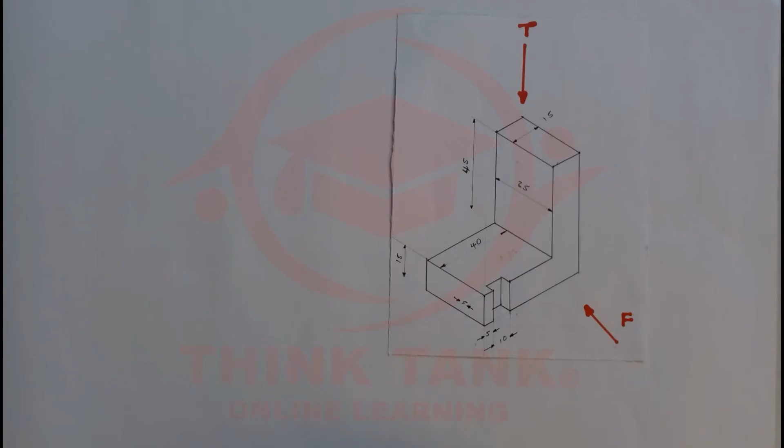So in this video, we're going to look at orthographic projection. So what you want to do, you want to draw the top view of this diagram and I want to draw the front view. Okay, so these are some of the N1 engineering drawing assignments.

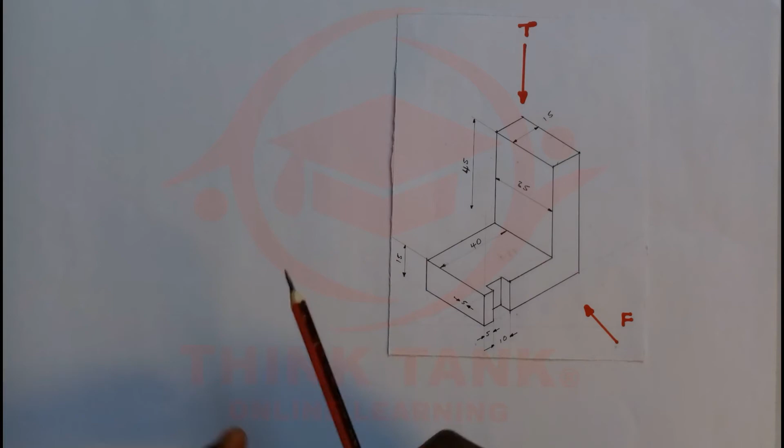Okay, so what you have to do, you have your pencil, a very sharp pencil, and in this case, I'm going to use 4H for construction, and I'm going to use B and HB for outlines. You also have to have your set squares. So this is the 30-degree set square, and this is the 45-degree set square.

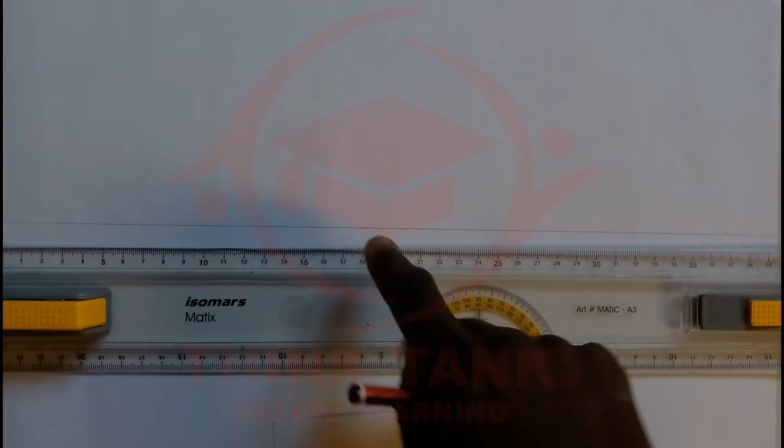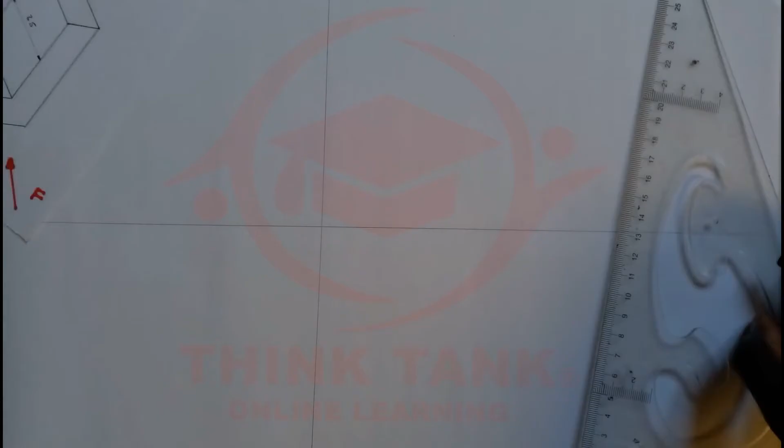Okay, so I'm going to draw this, and you're going to choose which view is easier for you to draw, the front view or the top view. So I'm going to start with the top view. I think it's easy for me. You can start with anything that you like. Okay, so from this, I'm going to measure just a distance, and we're going to draw a horizontal line. So this one is going to be our reference line.

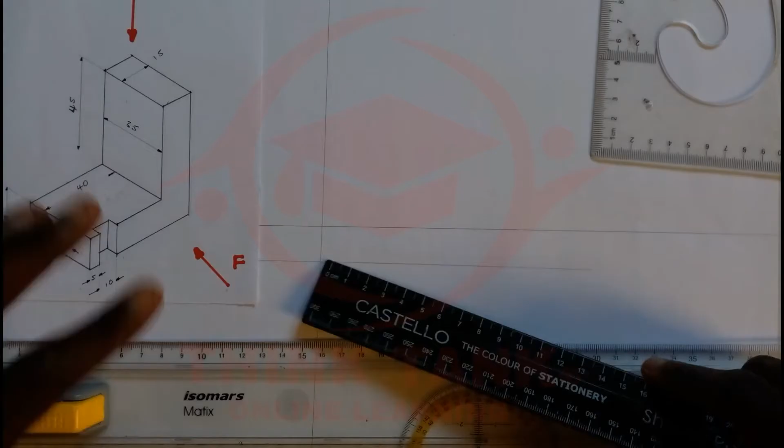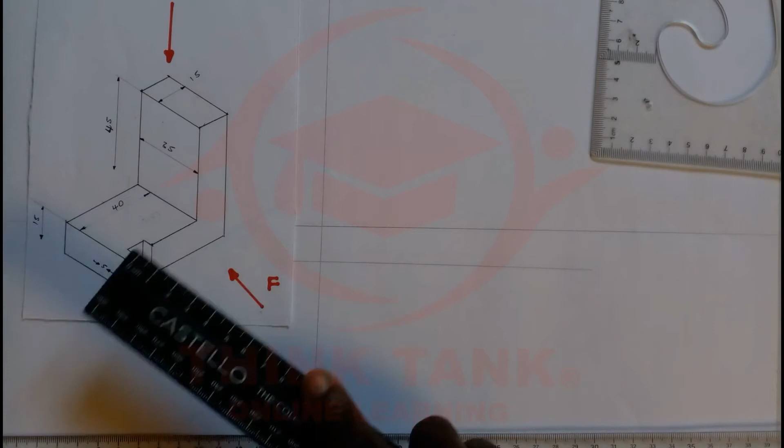So on the plan, I'm going to see this plane, and I'm also going to see this plane. That's what I'm going to see, and I'm not going to see any height. So any height, I consider it at 0. So I'm going to see the width and the length. The distance from here, when I look at the top, will be equal to 0. This plane and this plane will be on the same level.

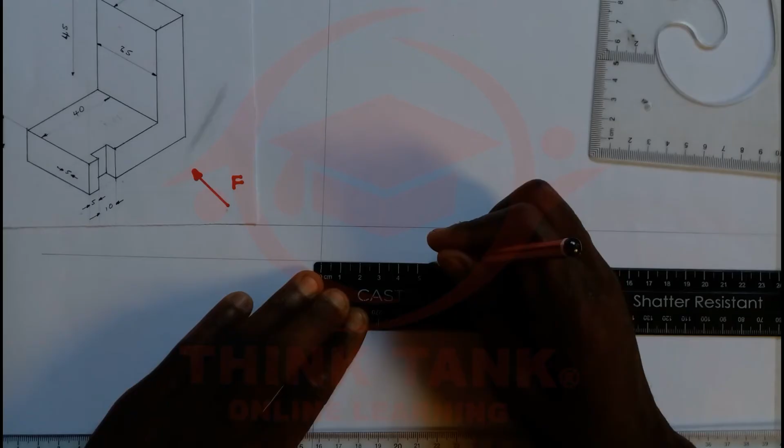Okay, so what is going to be the total length? So the total length is going to be 40 plus 15, and that's going to be 55. Okay, so starting from here, I'm going to measure 55 right here. So this is going to be 55. And I'm going to project it upwards because I'm going to need it later when I draw the front view.

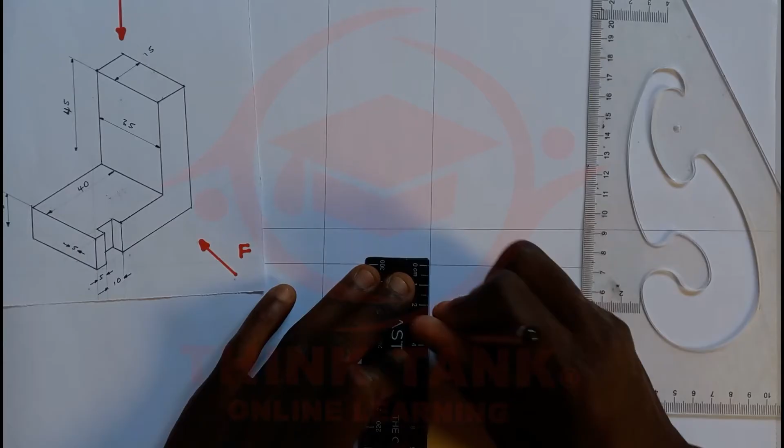Then what's going to be the width? So the width is right here. The width is 25. So I'm going to measure 25 from this line. That's going to be 25. And I'm going to project it right here using a T-square. Okay, and I have this distance, which is 15. From the end, I'm going to measure 15 from this line, and I'm going to project it upwards because I'm going to need it.

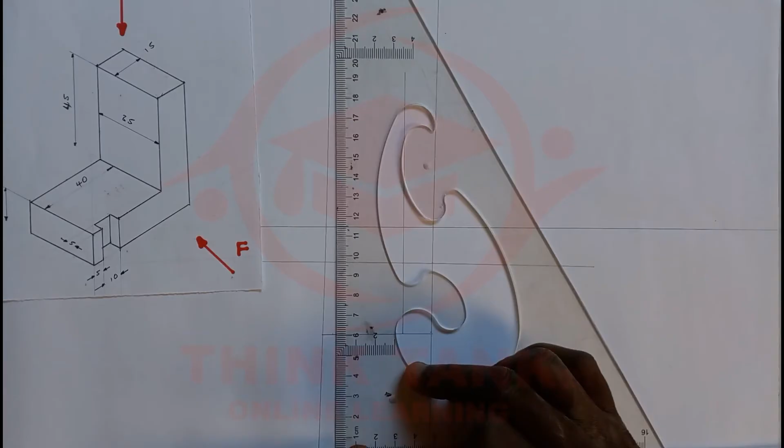And what do we have? So we have some demarcations here, some pattern here. I'm going to measure 5 millimeters from this end, from here to here. 5 is right here. Now I'm going to measure 10 again. You can just measure 15 starting from this end. Okay, just like that. And I'm going to project those lines upwards. We're going to need them. Okay, and we also have a distance of 5 from here to here. So I'm going to measure 5 right here.

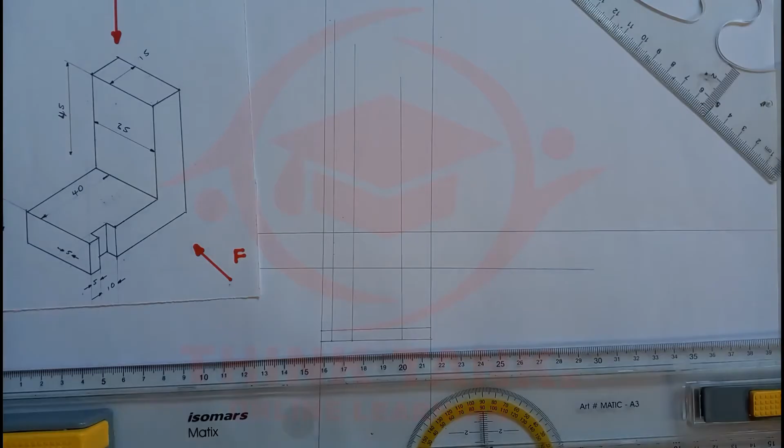Okay, like this. And now our plan is almost done. So what I'm going to do, I'm now going to outline. We said we're going to see this plane. I'm going to call it 1. Okay, so let's outline 1 right here. This is plane 1.

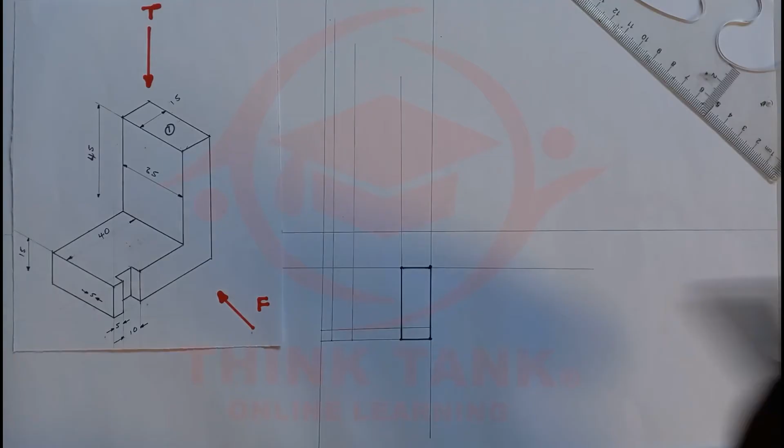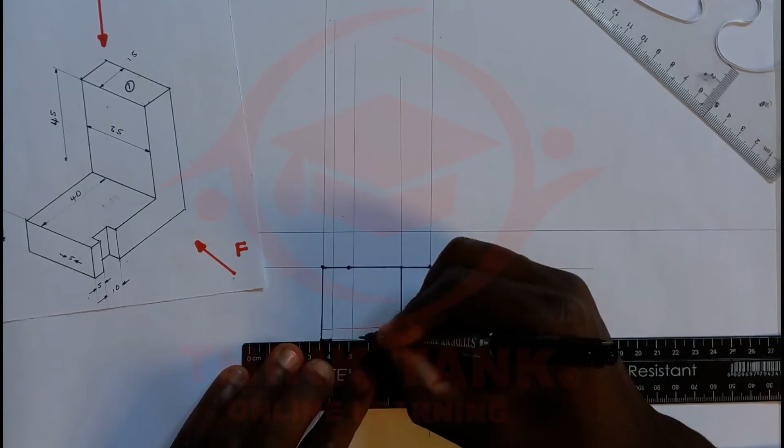And there's a distance here, which is the height, but that is going to be 0. So I'm going to see this plane from here. It's going to be good, and I'm going to have some demarcation here. So you can outline this side, dot and dot. Also do the same right here. And here, we're going to have a demarcation right here.

And also connect this and this and this. And this is going to be our top view. So this is plane number 2. Those are the planes that we're going to see when I'm looking on the top.

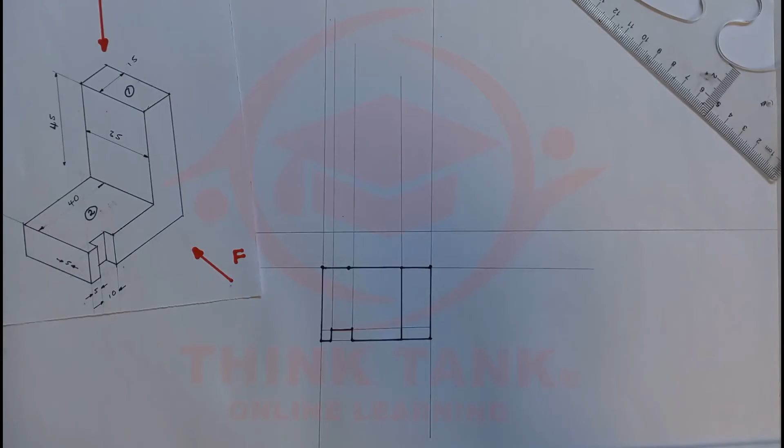Okay, so let's go to our front view. So on front view, what do we need? We're going to need the height and the length. And fortunately, we have the length. We're going to get the length from our top view. Okay, so what is going to be the height?

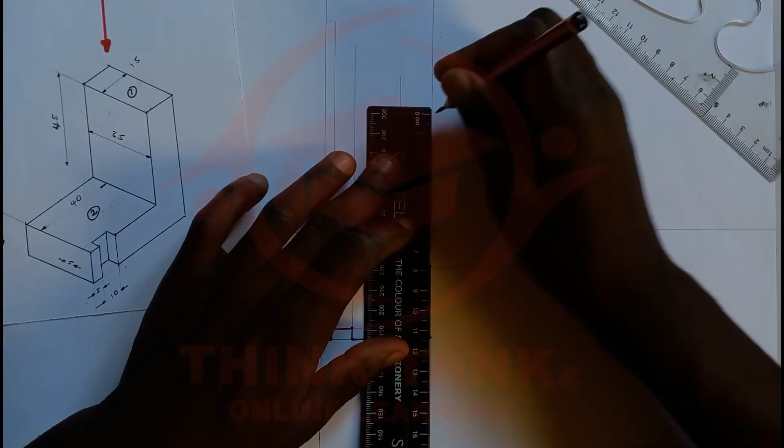So the height is going to be 45 from here to here. And we're going to have 15 again from here to here. So 45 plus 15, that's going to give us 60. So we're only going to measure 60 from this side. And we're going to project using our T-square. Okay, like this. And what else?

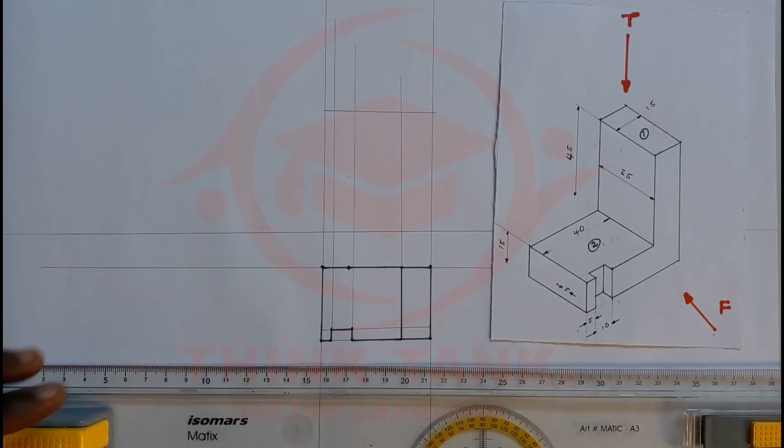So we need a height of 15 from here to here. We need a height of 15. That's going to be height of 15 right here. And we're going to project it like this. Okay, so now it's time to outline.

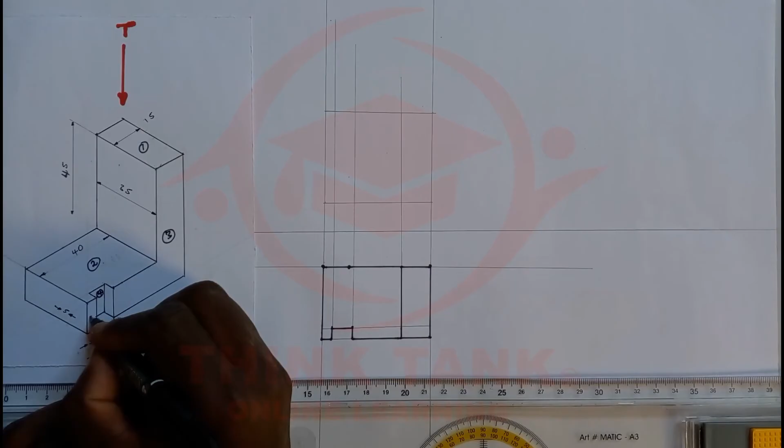So like what we did, we're going to name the planes that we're going to see. So I'm going to see this plane. I'm going to call it plane number 3. And I'm going to call this small plane, plane number 4. I'm going to call this plane, plane number 5. And what will happen to the width? The width is going to be 0. So the distance from here to here is going to be 0. It's going to be on the same plane.

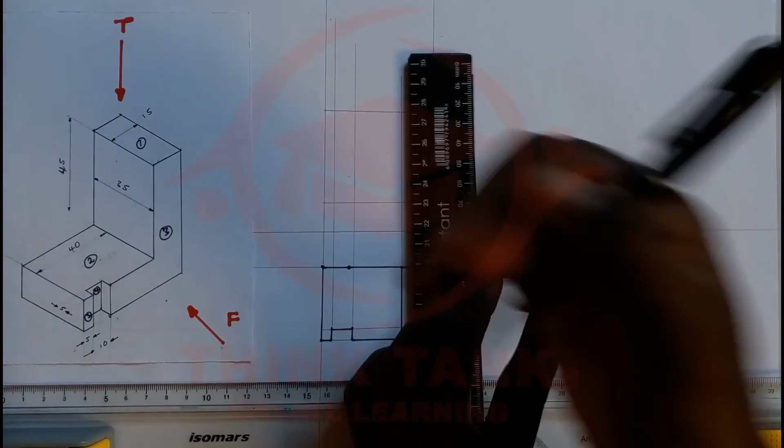Okay. So let's draw what we're going to see. So let's start by drawing plane 3. Okay. So plane 3 comes from here to here, and right here. Okay, so this demarcation, there's going to be width here, but you're not going to see it. It's going to be on the same level. So let's finish drawing our plane 3.

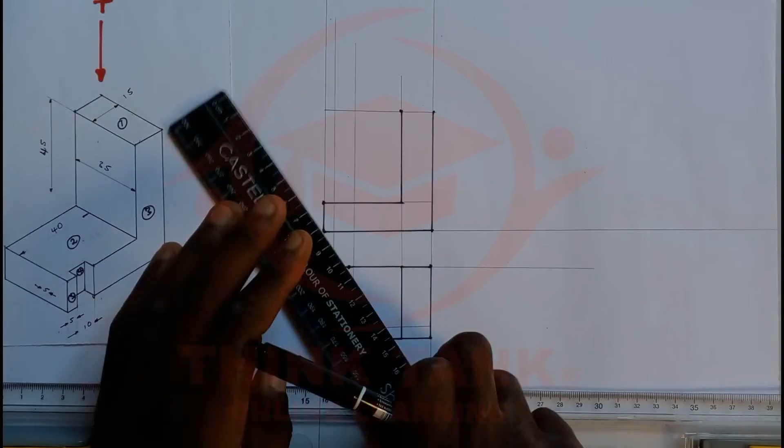Okay, now let's go to plane number 4. So this is going to be the plane number 4 right here. I'm going to draw it like this. So this is plane number 4. And what about plane number 5? So plane number 5 is already there. So this is our plan, and this is our top view.

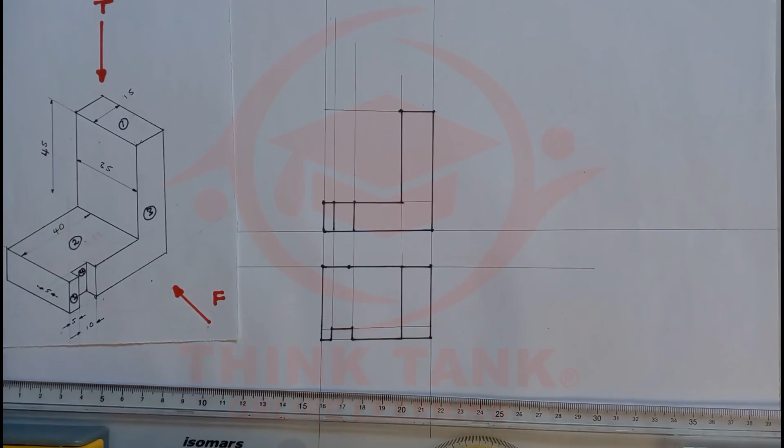And if they ask you to add any dimension, you can add. And let's just add 2 dimensions here. So let's check the overall length.

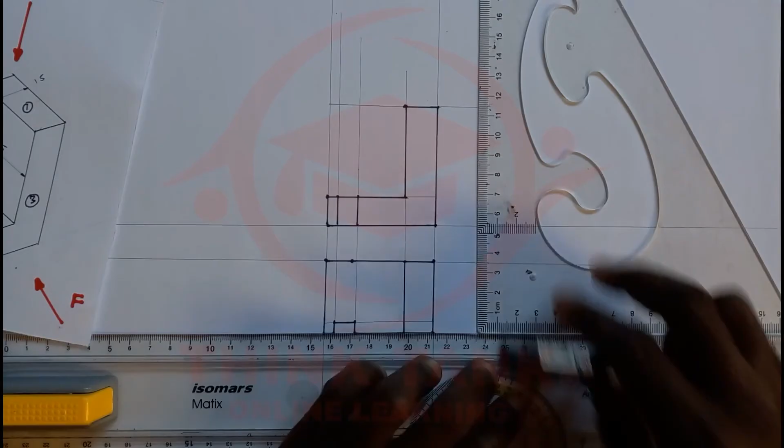Okay, this will probably give you some marks. Normally they ask you to add in 3 dimensions on your drawing, and you take all those marks. So from here, let's add the overall length. And what is going to be the overall length? You say 15 plus 45, and the answer was 60.

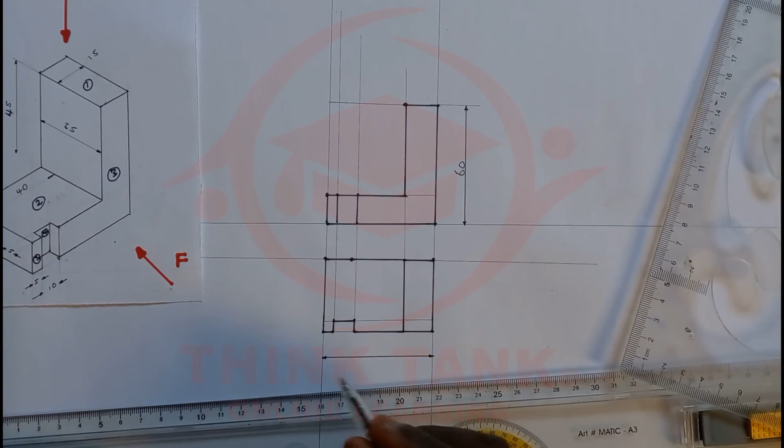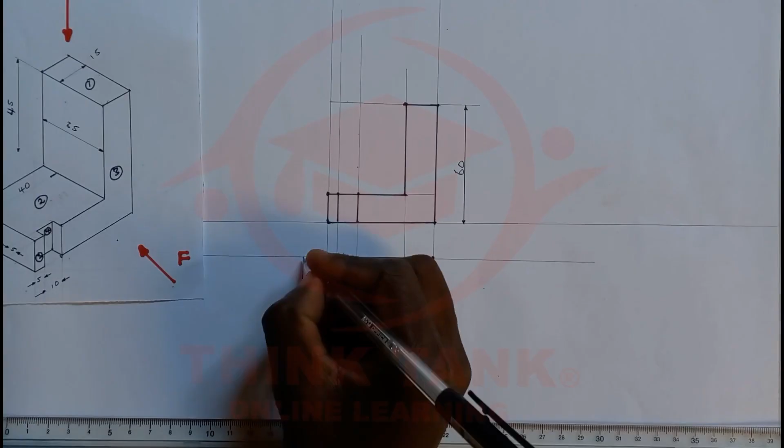And I'm going to add the overall width. Okay, so this is the length. What I've added here was the height. So I say this was 45 plus 15, and you get 60. And now what you can do, you can even add the width. Okay, so let's add the width. And remember, all your drawing should be done using a pencil. Okay, so the width is 35.